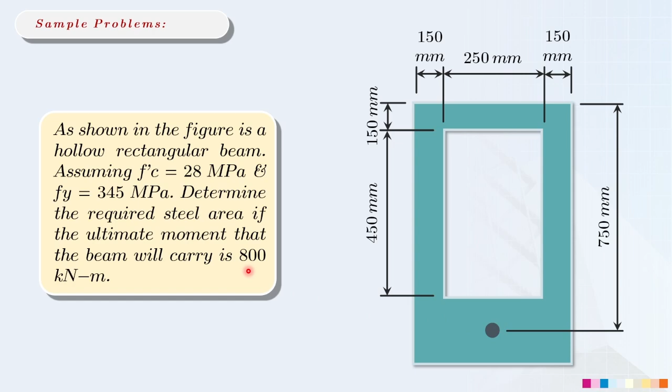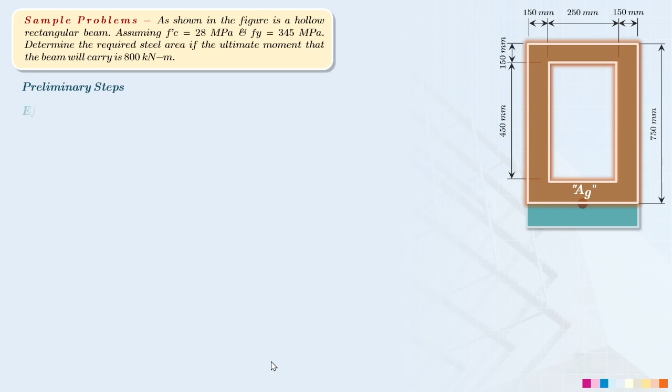Okay, so given tayo ng hollow rectangular beam with the following dimensions. So we need to determine how much steel area would be enough so that it can carry the 800 kilonewton meters. Okay, so let's proceed with the same steps that I discussed earlier. So we need to determine the effective depth. Obviously, the effective depth here is the same with our given, which is 750 millimeter.

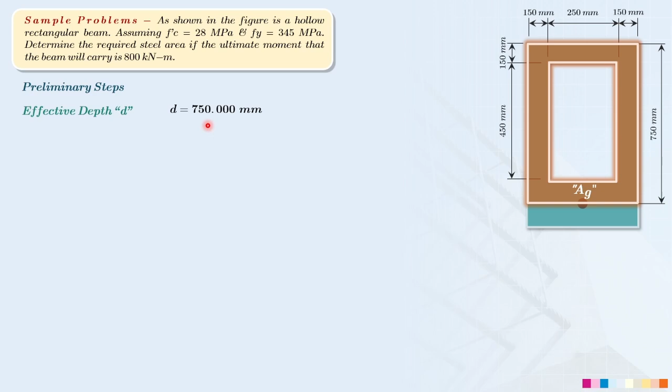So the next preliminary value that we need to determine is beta 1. Our f'c is between 17 and 28 megapascal, so the value for our beta 1 is equal to 0.85. The next step is the gross area. So yung gross area natin, let's determine first yung total width of this hollow rectangular beam, which is 150 plus 250 plus 150, equal to 550 millimeters.

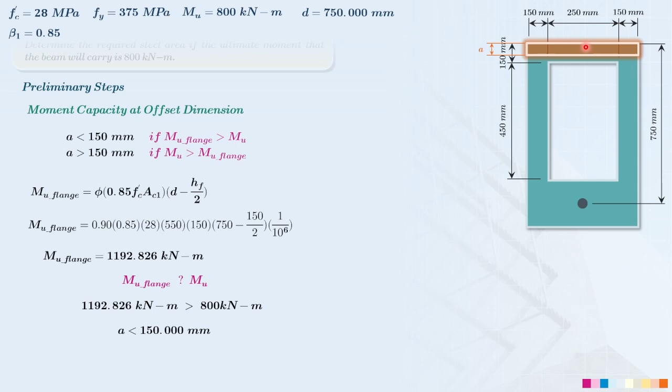Ibig sabihin lang po yun, class, is yung value ng ating A should be less than 150 millimeters. Ibig sabihin lang po niyan, class, ito po yung magiging area of compression natin dahil dito sa interpretation na ito. Okay? Now, since nalaman na natin na yung area of compression natin ay hindi lalagpas ng 150 mm, what we need to do here is we can proceed with our steel area limits.

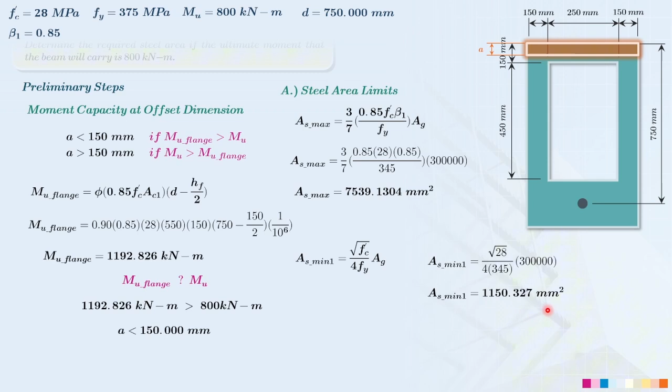But first, we need to determine the maximum steel area using this derived formula. So once we substitute the givens here, ang makukuha nating maximum steel area, this is now equal to 7,539.1304 square millimeter. Then ganun din yung magiging approach natin for our minimum steel area. So in the determination of the first minimum steel area, ang makukuha natin dito is 1,150.327 square millimeter. Okay? So, ganun din for our second minimum steel area.

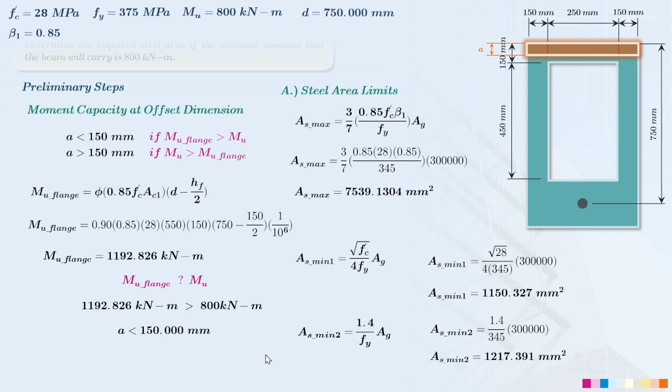So, makukuha na rin natin dito is 1,217.391 square millimeter. Ibig sabihin lang po nun, class, para makuha na natin dito kung alin sa dalawa yung magiging minimum steel area natin, we need to choose the larger. And the larger here is this one, 1,217.391 square millimeter. Ibig sabihin lang po niyan, class, yan po yung magiging criteria natin later on when we determine the actual steel area.

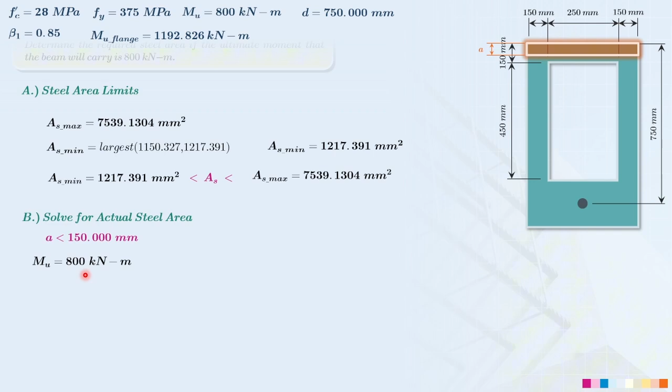So ideally, yung ating actual steel area ay manggagaling sa condition na ito, which is dapat yung ating area of compression should not exceed 150 mm. So yan yung magiging condition natin. And also, our design moment here is 800 kilonewton meter. Ngayon, paano natin isosolve yung kanyang value of A? Kasi yan yung unang muna natin kailangan gawin in this non-rectangular section.

Alright, so let's recall for our area of compression, which is just simply A times B, or A multiplied by the width. So, yung moment capacity natin, we can already directly substitute yung ating area of compression, which is the height of A and then yung width of our section. And then yung ating moment arm, since hindi nga siya lumagpas ng 150 millimeters, yung distance ng ating compression hanggang tension is effective depth minus yung kalahati nung A. Okay? So, substitute lang natin to.

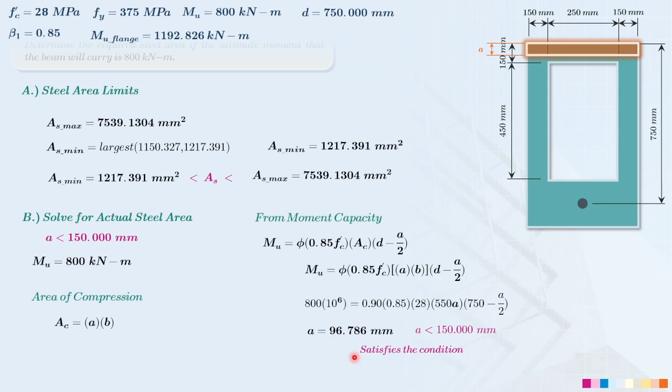Ang makukuha nating value ng A dito, this is now equal to 96.786 mm. Ibig sabihin lang po nun, hindi po siya lumagpas ng 150 mm, which is yung naging conclusion natin kanina in the comparison of the moment capacity ng flange tsaka yung ating given na design moment. So, it satisfies yung condition. Ibig sabihin tama yung ginagawa natin so far.

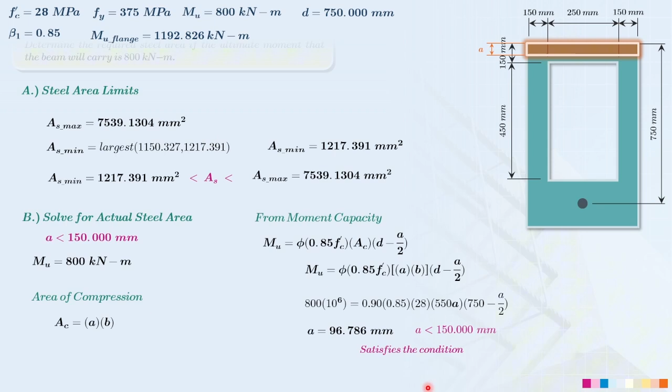Okay, so let's proceed naman sa ating equilibrium condition. So of course, compression is equal to tension, so dito pa rin tayo mag-ending. However, dapat yung gagamitin nating area of compression here, yung dinerive natin kanina na A times B. And then, let's substitute using yung nakuha nating A kanina. So ang makukuha nating area of steel, this is equal to 3,672.27 square millimeter. Ibig sabihin lang yan, in comparison with our minimum steel area, okay lang po yan.

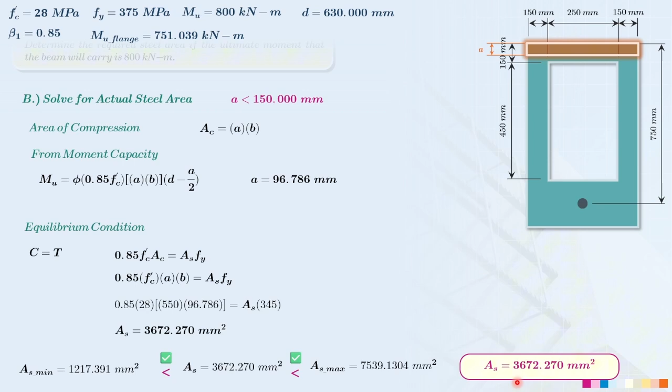Pero ang pinaka-critical dito, when we are comparing it with our maximum steel area, dapat ideally, kapag nasa singly reinforced beam ka, dapat hindi siya lalagpas sa ating maximum. And it turns out na hindi siya lumagpas, napakalaki nung gap nila. Ibig sabihin lang nito, class, ang gagamitin na natin for the actual steel area, this is now equal to 3,672.27 square millimeter. So yan yung ating answer, since ang pinapahanap lang sa sample problem na ito is only steel area.